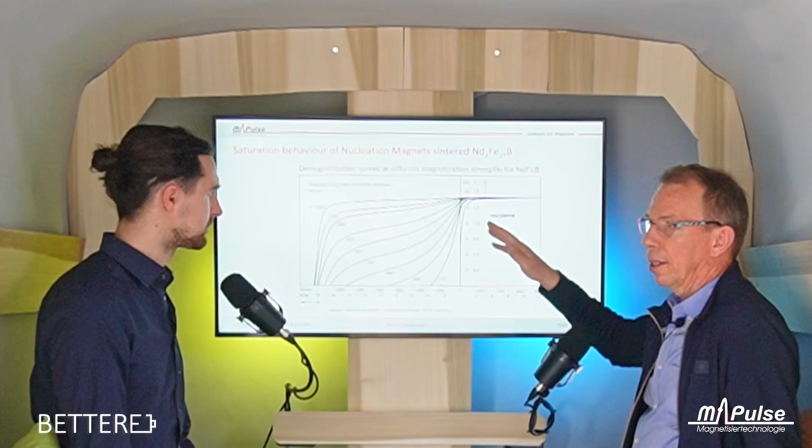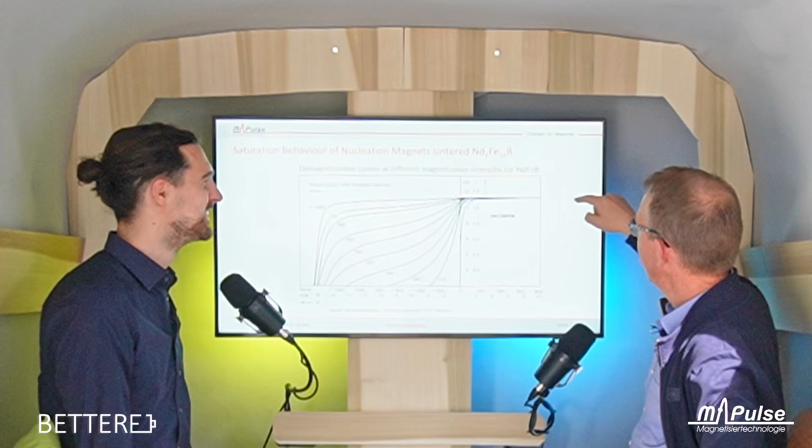So on the y-axis here we have the magnetization of the magnetic material. This is the field strength you apply. Whenever you apply a field strength, the magnet will react in its magnetization. So normally if you apply a positive, then the magnetization goes up positive. Then outside of the screen right now. Outside of the screen. Then you return back to zero and it stays somewhere here. If you shoot over into the negative, it remains stable until a certain point. We call it the knee point, and it collapses, passes through zero, and then we can mirror the whole loop into the negative.

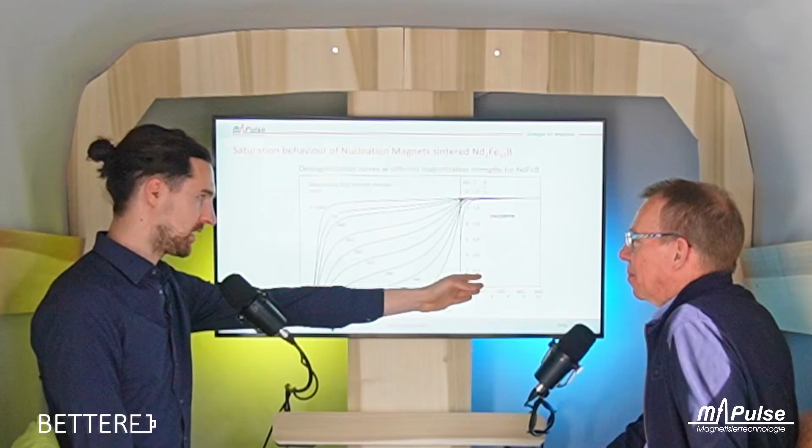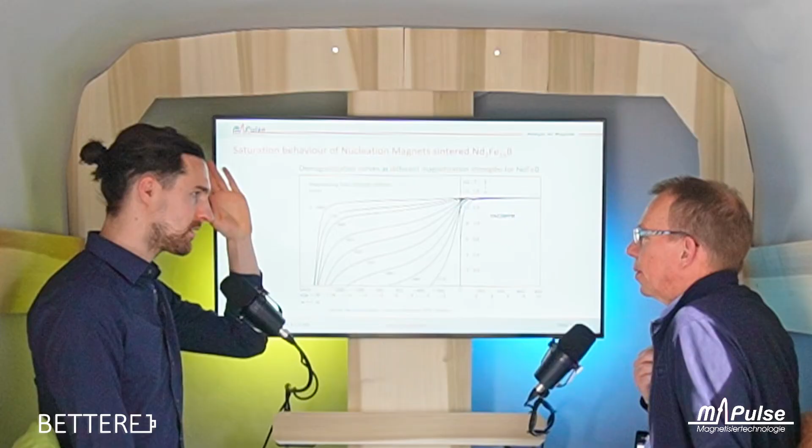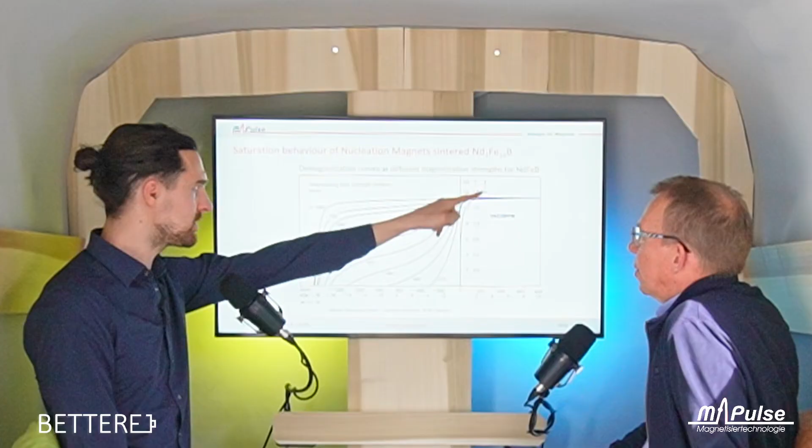Okay, but to explain this in layman's words, because I'm a battery researcher and you really have to be careful not to leave me behind. This is the positive magnetization area, the excitation, so to speak, right? So when I have a piece of magnet, and I apply this field to this magnet, then it will be polarized in the direction that I apply this field strength to. And there's a maximum that I can reach, right? That's this line. And depending on how far you go, you will be on one of those equilibrium lines later on.

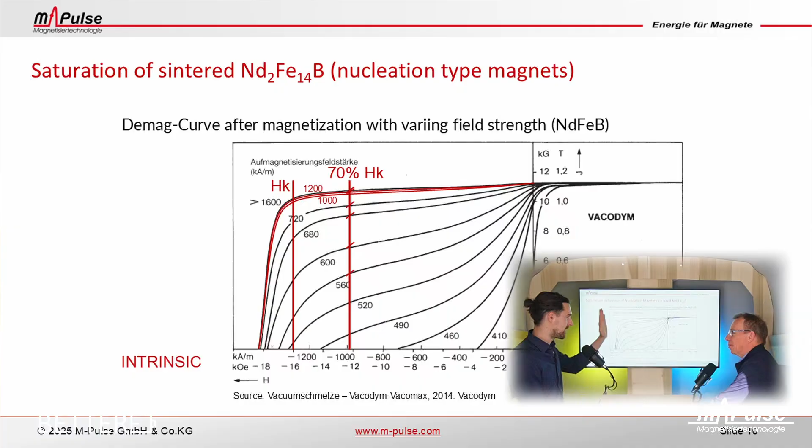Meaning, when I have excited this material, let's say I did a good job and I applied a really high field strength to it, then I'm on this line. Which means that when I later load the motor, put a force on this magnet because I'm pushing down the gas pedal or the electricity pedal, then you go in that direction. We are pushing in this direction, and the magnet has to withstand this force. Right. And it can go all the way up to here, and at some point you will lose the magnetization again. Correct? Absolutely.

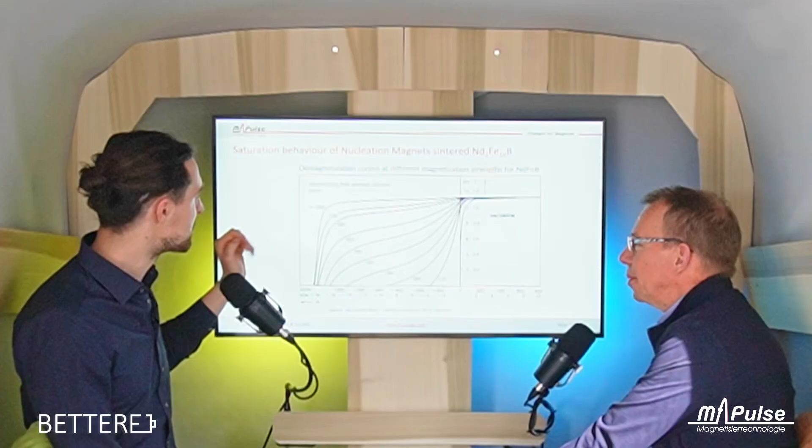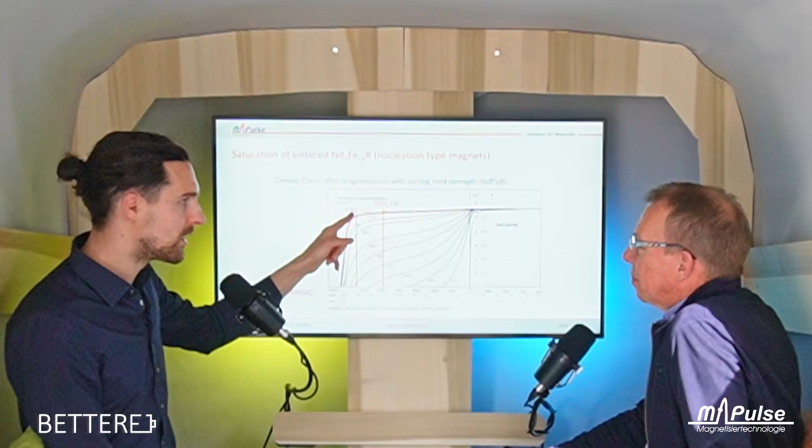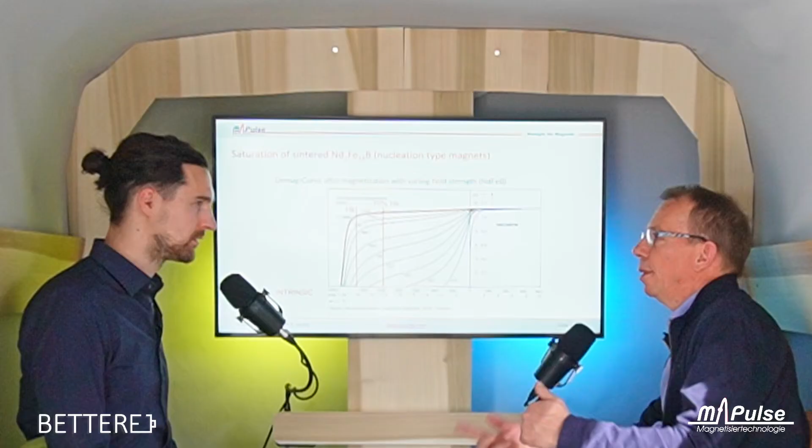So the goal is, I think, if you go one slide further, then I can put it in my words. At this point, and you can take over again. If I'm at this point and I would go further, I would lose the magnetization of my motor. So I would basically break the motor. Correct? Yeah, it is a destruction of the motor because the magnets will be reverse magnetized or collapsed in their magnetization. So the motor would be damaged. You have to disassemble the rotor and bring it back first into the thermal chamber and then into the magnetization. Then you can reassemble, but it's like spoiled. So why is there the 70% mark then?

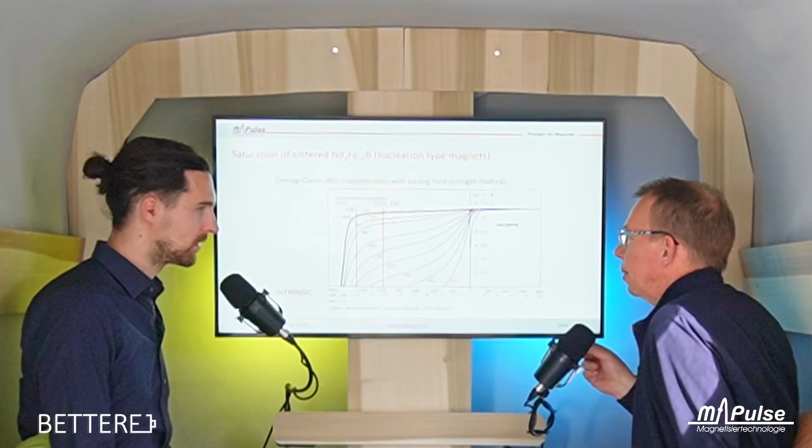We have to define what we need to do, what our task really is, and what we understand under saturation of a magnet. Yeah, it is easy to understand. If I go to infinite in that direction, I will be on the outest loop in the reverse until we cross here HcJ. If I only go to 410, I will collapse this in this line in the negative way.

If I go to 460, I will take this path. If I go to 700 here, I am almost here. But then we call it a gray zone. Here is what is very interesting for us, because I can go back a few slides before. There are some technical reports written which define what is saturation.

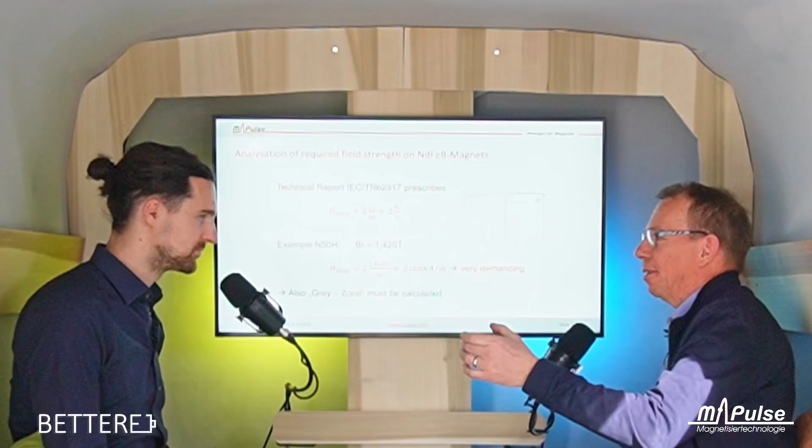So in layman terms, saturation is... In layman terms, I have a very good equivalent. If you have a glass, you can fill it up with water. When is the glass full? When it's full. You can pour more water, it will not be fuller. Same for saturation of a magnet, right? And the same for the saturation of the magnet.

So in an analogy, the saturation is equivalent to the excitement of a magnet, and then the maximum force that this magnet can exhibit onto a polarized other material. Yes. That is the maximum use of it. And in order to achieve this fullness of a glass of water, this says we need a certain amount, and then they put a factor 2. It's like filling up the water, and then you pour more because you might shake something.

Yes. There are physical reasons for that, which are well investigated. A little bit more of what? That's my question. Of field strength. Of the horizontal. Which correlates with amperes, right? Yeah. So what they claim to have, the 2268 kiloamps per meter, is a weird unit. Ampere per meter is something about magnetic field strength.

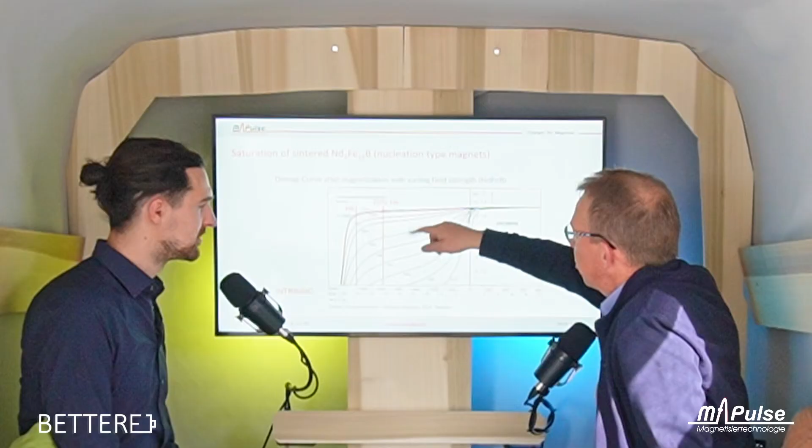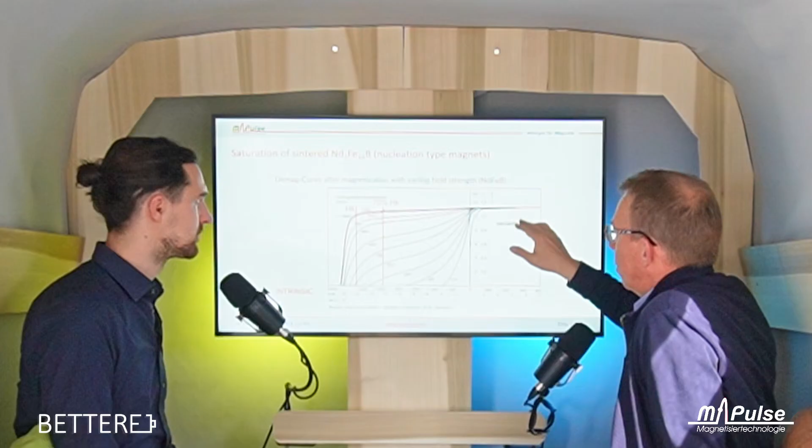Yeah, but that's the amperage density, linearly speaking, that I need in order to polarize the magnetic material. Correct. Until saturation. So when the glass of water is full. Yeah, correct. Okay, gotcha. If you take this into your mind, 2268, and we go back to this, we see the assembly of these curves, and we see 1600 is pointed here as the outest part of fully saturated. Gotcha. Which is well developed by Vacuumschmelze in this case.

But we have also research on other brands or other types of these neodymium iron boron magnets. They all behave very similar. So 1600 is about the value that would be sufficient. And the technical report prescribes us 2268. We have to take the square of the ratio to understand the energy we need to provide to the magnetizing coil in order to establish the magnetizing field on this horizontal. So if we take the square, we have the energy that we pump into the coil.

And a difference of 2300 over 1600 is huge. It's like a factor of 2. It would mean that we cannot magnetize like 50% of the motors in the market.

So we must understand that there needs to be a gray zone that we need to consider from maybe 2200, but also down to 700, to understand where are regions in magnets that may be not fully saturated, physically speaking. Because the energy that you have to apply to those magnets is sometimes not physically possible, in the geometry that you locate the magnets in the rotor.

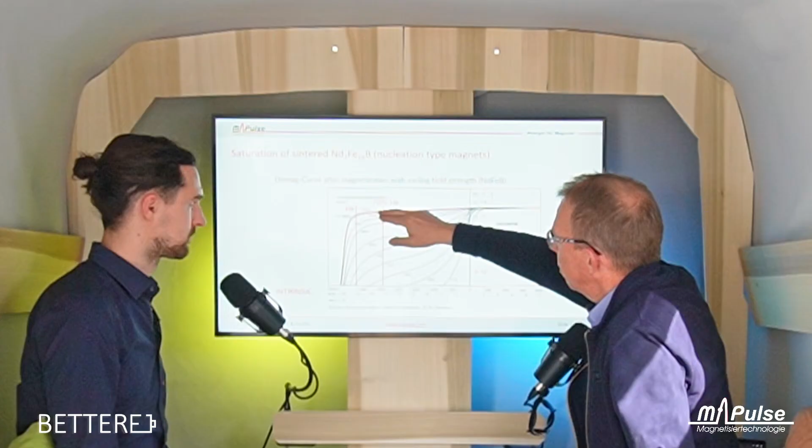a designer of a rotor will never approach the knee point in the working point. The magnet will be loaded by the stator field, which is always reverse, and the stator field will in the knee point demagnetize the magnet. You can lose magnetization and spoil the rotor by that. So he will always have working points in a region around 70% of the knee point, not far beyond.

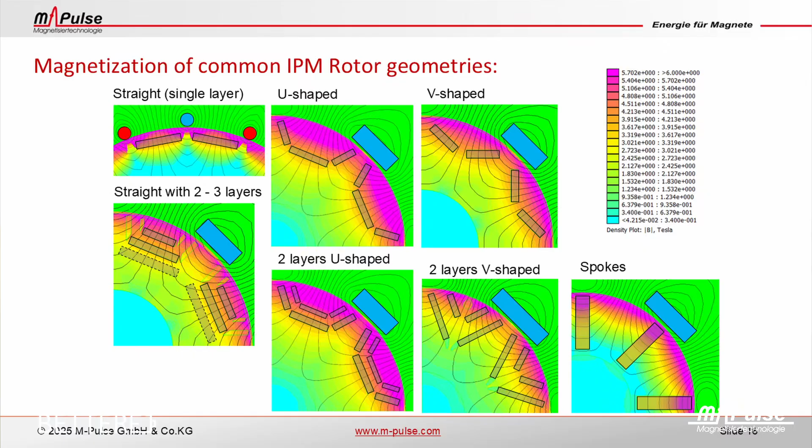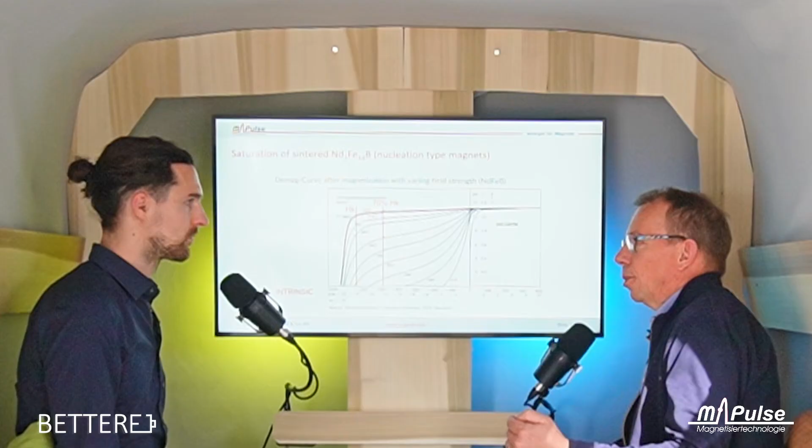But if we take this as a working point line, we can say 100% is right here, and if we have a magnetization of 720%, we are right here on that point, maybe with 90% of the magnetization. And by this, we can define a result of the magnetization that we provide. And since we are talking economically, our customers are interested in what is the result we have and what is the money that we invest. So this is our duty to make it transparent.

Yeah. So to summarize this, you are dealing with the physics of magnetization of magnets, obviously, to magnetize rotors that will then provide the torque for the motor later on. Okay. So how does it look like? How do you build those machines to magnetize rotors? Can you just explain a little bit your work in this regard?

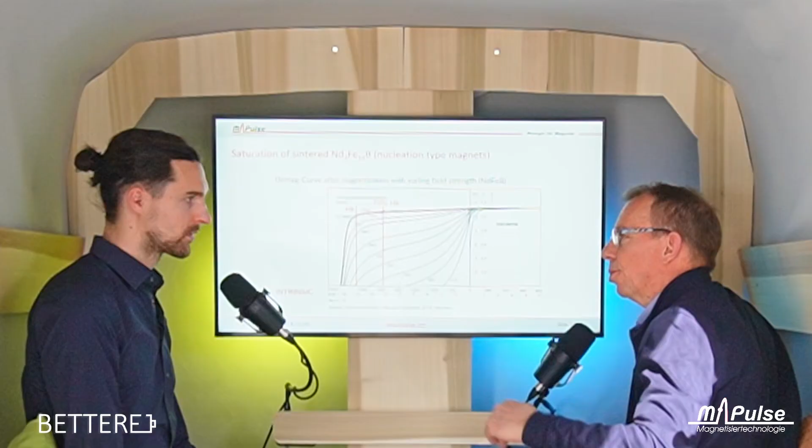The magnetizing machines are more or less capacitor discharge. We charge up capacitors up to voltages of 3000 volts or even more, and then the discharge will be triggered through a semiconductor and discharge along the magnetizing coil. And by this, the optimum is a nicely short pulse. Yes. And a very high current. Yeah, can you show? You have, I think, a good picture of this that we can have a look at. Yeah, exactly. I can show you here.

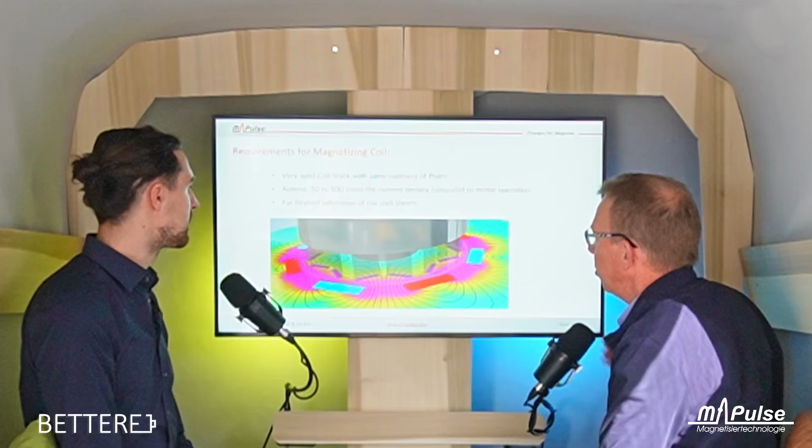This is the magnetizing coil with a plus conductor, a minus conductor, and inside you see the location of the permanent magnet in the rotor. This is a V-shaped rotor, and the flux lines can be also observed here. They pass through the magnets, and our task is to create field strengths strong enough to saturate those magnets. So the field lines, you have the different opposing poles, and then of course due to that the field lines are running around those magnets in a circular pattern.

And what you're trying to do is to let the field lines run through the magnet in order to polarize the magnet. So it's important that you orient your, do we call them electrodes? I don't know. Your magnetization electrodes in a way that they coincide with the desired direction of the magnet in order to be magnetized. Electron spins in the magnet. Yeah. Okay. No, electrodes, I called these electrodes right now. The conductors. Just call them conductors. Okay.

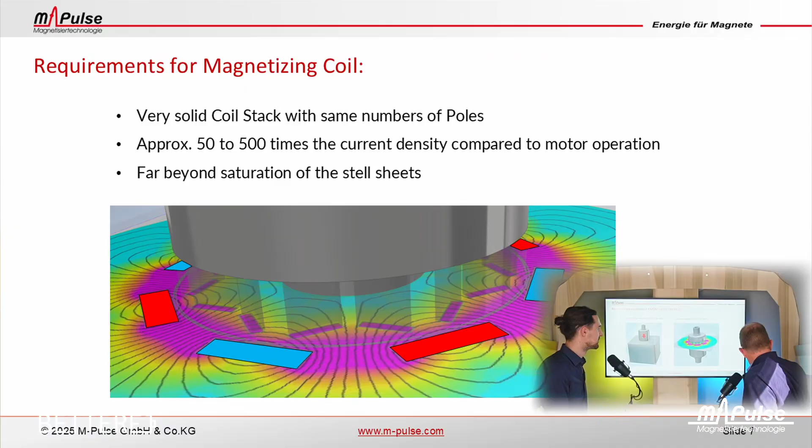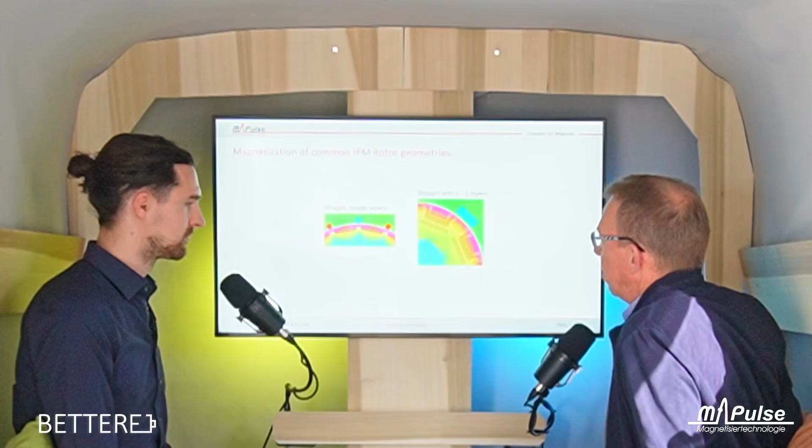You can see this would be a magnetizing coil. The rotor will be pulled in, and then the coil is like a stator all around the rotor. So then there will be different shapes available in the traction market. In e-mobility, they develop different styles or patterns of the magnets. Like you see these here, they are mostly used for hybrid motors with a high number of poles, or you can have other straight lines. And there are many others, like a U shape. We call this because it's like a U.

And every topology has different torque characteristics, or why would you want to have different shapes of magnet placement? In the first approach, you want to have a high use of the magnet. So you might be wanting to bring in a lot of permanent magnets and still have the effect. So you may double the lines. You may go deeper. If you have only a surface magnet, you can bring in more magnet material in the U shape.

Okay. But still, there will always be a reluctance moment that is created by the steel path, which is going from here to here, between the magnets. And this creates an additional torque which can be used. It's kind of a hybrid between a reluctance motor and a permanent magnet motor. Okay.

And then there are spoke designs. There are different designs. Spoke is one of the examples which mostly cannot be saturated with external magnetization, because the magnet material is too deep in, and we cannot approach it in a radial design, right? But in an axial design. We come to that, yeah. I can show you. This will be the saturation line we can achieve. The black line is showing how deep you can go. We cannot go deep enough in the radial.

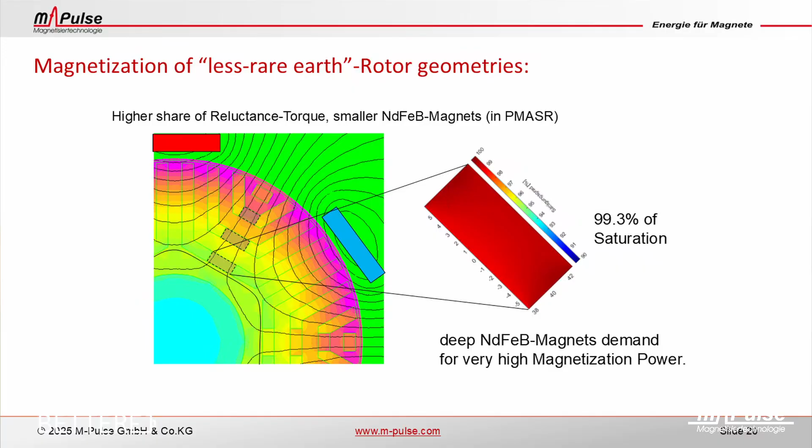We make a U shape and we take out these magnets on the side. And we use only a few magnets, so just a percentage of the magnets that were used. And to fit the large volume, let's say low power density market, this would still be sufficient, I assume. Yeah, that's a good approach. Well, then still there are magnets and we have to still magnetize them. Some of them may go deeper in now. We can go deeper because we don't saturate the bridges so much. They can be deeper. But this deep magnet has to be saturated from the outside. So we have to create a tremendous current on the outside to supply sufficient field strength down here.

We evaluated and we gave out a map of where is the dark red, where is the light red, and on the screen it probably just looks red. Okay, I can say here is light red, there's dark red. Light red is 99%, dark red is 100%. In average, this will be a saturation of 99.3% on the 70% line of the knee point. Okay. So that is what we evaluate and what we can offer to show what can be achieved. So when we design new styles of motors in order to minimize the amount of neodymium, we can go these ways. It is always good to discuss. If someone develops a motor, it's always good to ask back, is it magnetizable or not?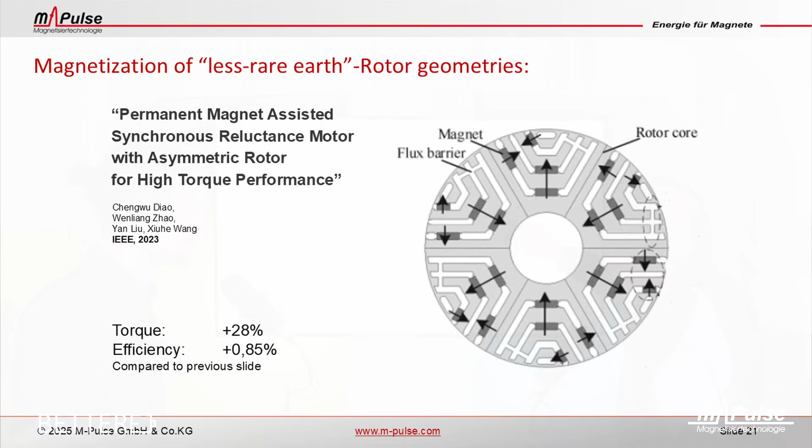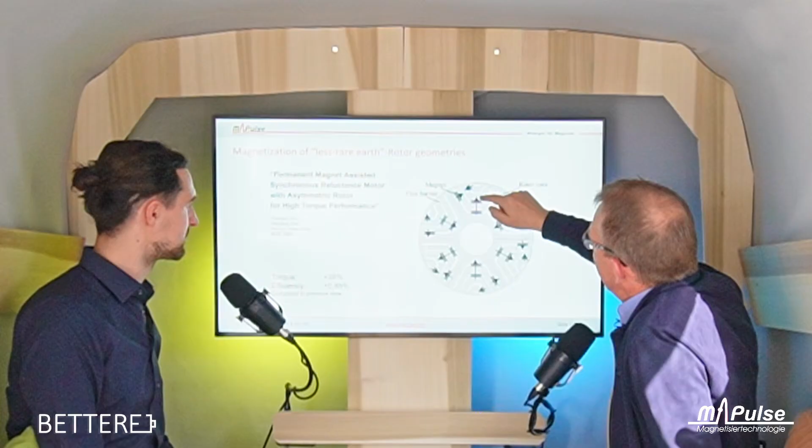Okay. I can give you an example of research that has been done, which is very nice. Research meets reality. This is real research. It's almost the same motor that we've seen here, but it's an improved kind. The researchers have taken out the magnet from here and brought it up there, and they added one here. It's a fancy shape. As a layman, I wouldn't understand why it's better, but it comes out with a higher torque, plus 28% of the torque, and also with a better efficiency of 0.85%.

Where's the motor efficiency at the moment, to put this in perspective? In a range of more than 94, 95% is the normal. So let's talk about losses. If we have 5 to 6% losses, and we can take out 0.85%, that's already decent. We have much better performance. Yes, it's like 20% of gain. So it's a good idea to do that.

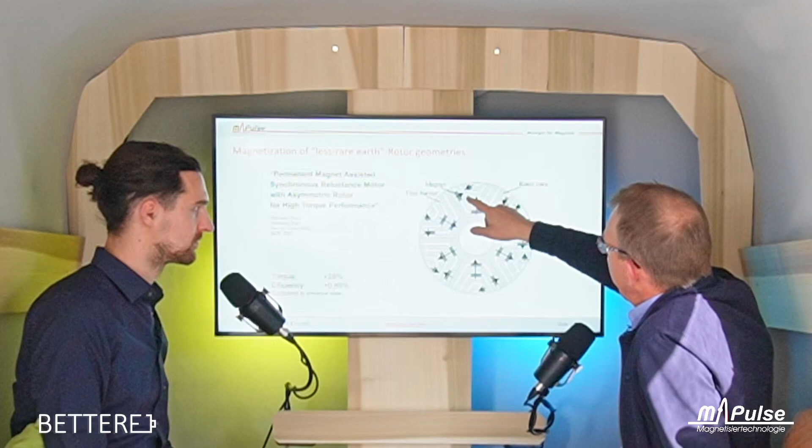Now, if we take a look at the shape of the magnet that we have, we see this magnet might be kind of contradicting the directions that we have. And if we try to magnetize these, we see that in order to saturate the guy in the back here, as we have discussed before, we need to pump in a huge field into this depth.

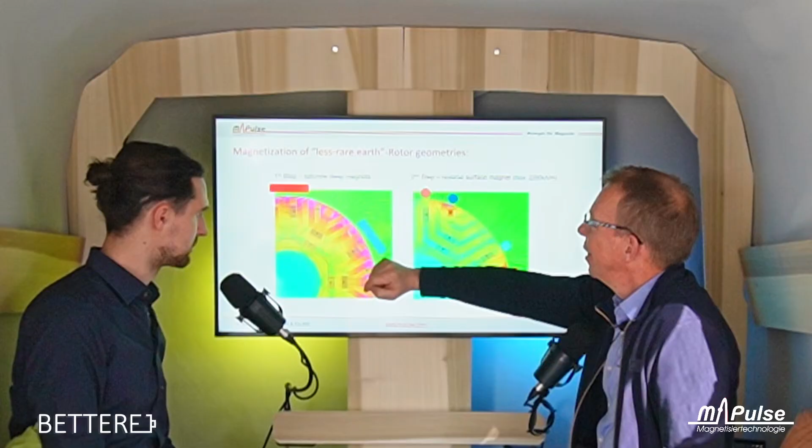In order to do that, we will already magnetize this into this direction. There's no way we can shield this magnet from that field we need down there. So you always need a two-step process. This will be magnetized in the wrong direction in the initial state.

And something I did not explain previously is these rare earth magnets, neodymium iron boron, are so-called nucleation magnets. They have a status we call a virgin status after thermal demagnetization. There is a nucleation effect which makes it very easy to magnetize them the first time. After that, this nucleation is gone and everything is arrested where it is, and we go only along the outer shape of the hysteresis loop.

Okay, so you need a high force, high energy in order to reverse the magnetization, as you explained for this design. The reverse, that's the second step, is important and needed. So this is the first pair to magnetize, to saturate. What are these called again? Conductors. You need two conductors giving the overall magnetization, and then you need smaller conductors specifically targeted at one magnet to reverse its direction.

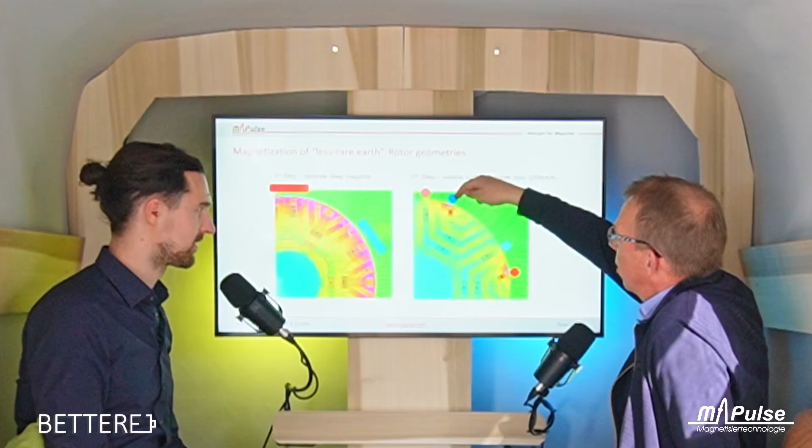The goal here is only to reverse this, so we have a strong current right beside, and we need a smaller current which is protecting this guy, because this may not be reversed, but we need a stronger field here. We need about 1.5, 1.6 times the HCJ value. Whoever knows something about magnets may know HCJ is the zero cross of the loop after the knee point.

And we can supply up to 2,200 kiloamps per meter, as we calculated, inside this magnet. If we divide by 1.6, we come out at an HCJ value of maybe 1,400. To show off against competitors. Just kidding. But this is for many of these magnets not sufficient.

So that means it will not be fully magnetizable. Even with this fully strong reverse field, it may not be possible to magnetize this assembly. So the idea is very good and efficient, but the production process is not possible with a second-step after-assembly magnetization. This shows whatever we change for the reduction of the amount of permanent magnet also has to take into account the production process. This is where we come in.

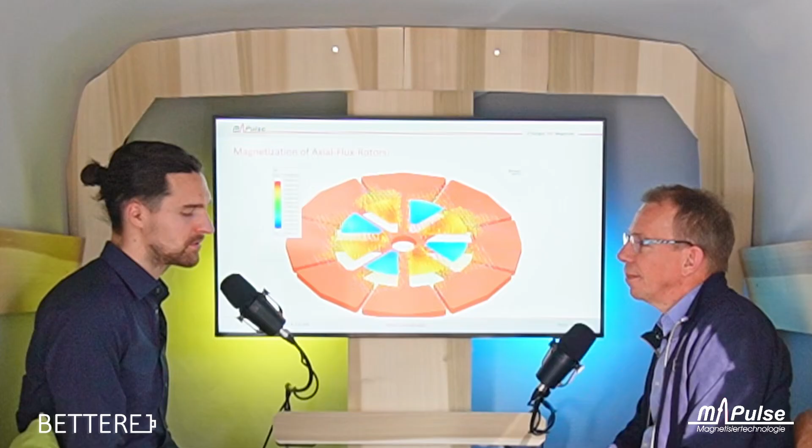Okay. Sounds good. If we look at the developments in e-mobility in general, I think we still have quite some challenges in front of us. And to shine light on this, I ask the leaders of our field 3 main questions repeatedly, and I would also like to ask them to you. From your perspective, what are the main challenges for building up the e-mobility ecosystem with respect to your field, of course? The supply chain, absolutely.

If we talk about the magnets, we have to pick up the fabrication and the recycling of permanent magnets locally here. We are still very much dependent on the Chinese. We won't come out easily, but efforts are taken to build up production lines for recycling. Companies and many institutes have developed processes, but they have to be applied in the field. And then the quality must still fit. The Chinese are ahead for that.

Okay. In terms of what? Also in the recycling of permanent magnets. As far as I'm informed, they disassemble the magnets into raw grade of the elements, while we still use the compounds and assemble them into new ones. Okay. So there's some room that we need to work on.